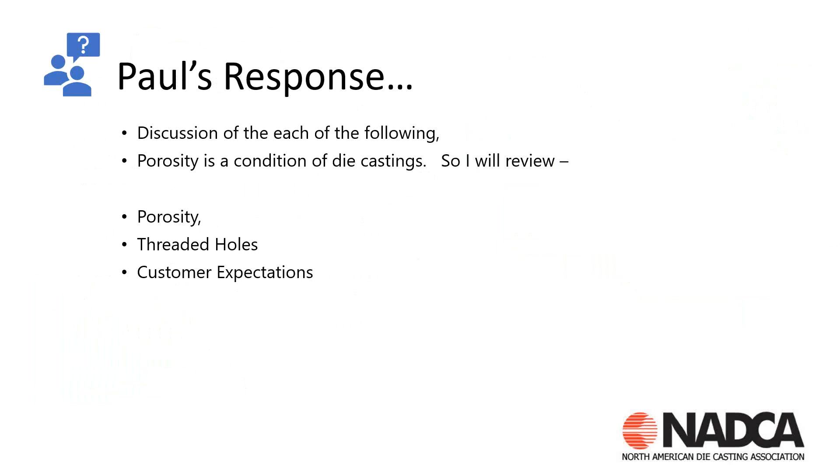Let's talk about threaded holes for just a few minutes. As we see porosity, it's present in the die casting, and the question is where it's coming from—is it from the die, trapped gases, the design, or the process itself? Are we trapping gas in the process? There are a lot of sources for porosity.

When we look at tapped holes, the reason it's a concern is because of thread engagement and thread integrity. When we're looking at thread engagement, we want to make sure that if we have porosity in those threaded areas, as we do a torque test or a pull test on the thread, the porosity is not affecting the overall thread strength.

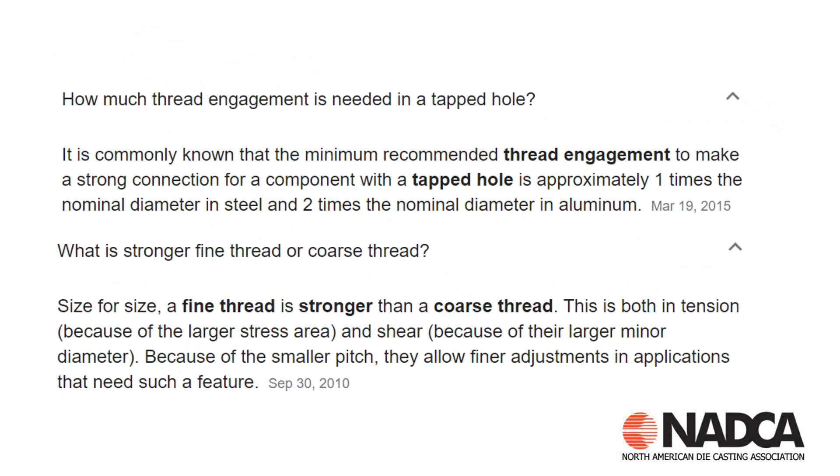One other comment here on the slide is thread size or thread engagement. With fine threads or coarse threads, finer threads are going to be stronger than coarse threads. So if you've got a coarse thread with porosity, you're going to potentially affect the integrity of the thread.

We can calculate—there are a lot of formulas—the actual thread percentage in die casting. When casting aluminum and then threading those holes, we thread using either a form tap or a cut tap. If we're forming those threads, we're actually moving the material rather than removing it. A form thread is stronger than a cut thread.

But the problem with a form thread is you have to follow the draft of the hole. So at the top of the hole, you're going to have less percentage of thread than at the bottom. So if we have less percentage of thread and we form those threads, and we have porosity inside that hole, that porosity being shrink or gas, it's going to affect thread integrity. So going back to the original question, what is the standard?

Well, once again, there isn't one, but I can tell you that external porosity on most standards is 1 millimeter, so 40 thousandths of an inch or less, is allowed on machine surfaces. Most standards then specify a location, and how much porosity you can have - 2 or 3 indications in a diametrical area or some area. Inside a threaded hole, we were typically only allowed 1 to 2 indications of 40 thousandths or less. If more porosity was present on the threads, then those castings became scrap.

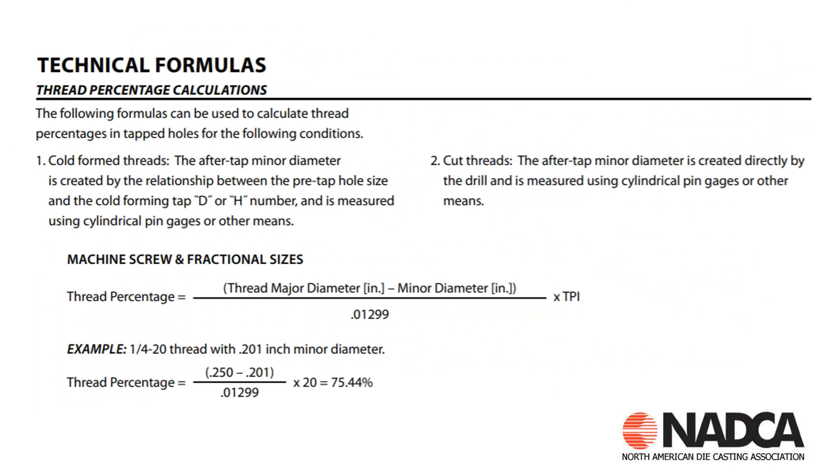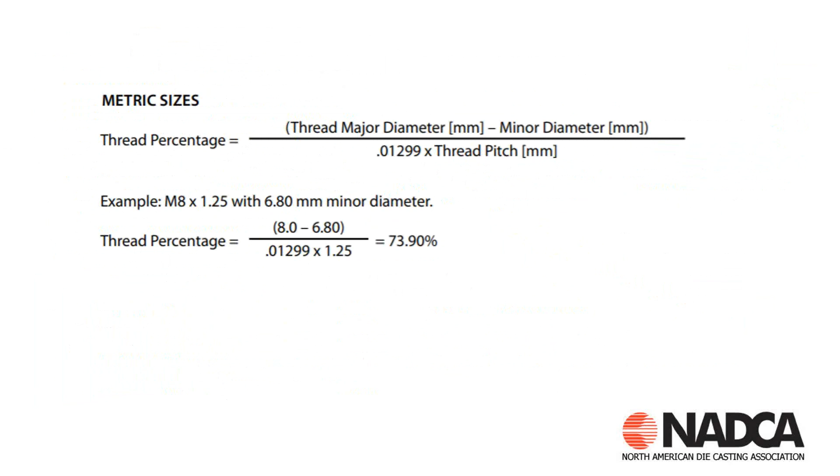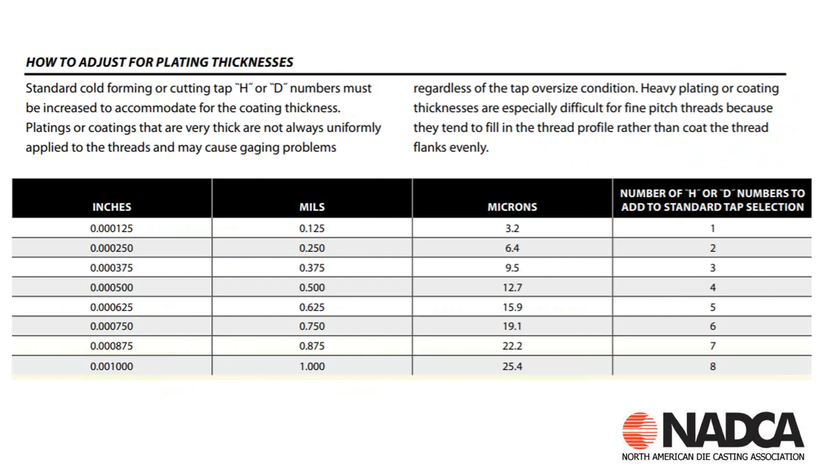So I know that didn't necessarily answer the question as far as is there a standard or what's allowed. I'm telling you, you have to deal with your customers and work with what percentage of thread you want versus what the porosity is going to take away. Each customer is different, and you're going to have to work with your own OEM on those. One other comment: when dealing with threads, you can adjust the D or the H level and adjust the size. That doesn't necessarily affect the porosity, it's just a point of interest.

There are publications that can help you on minimizing porosity. I just threw one up here, publication 516, a guide to correcting porosity.

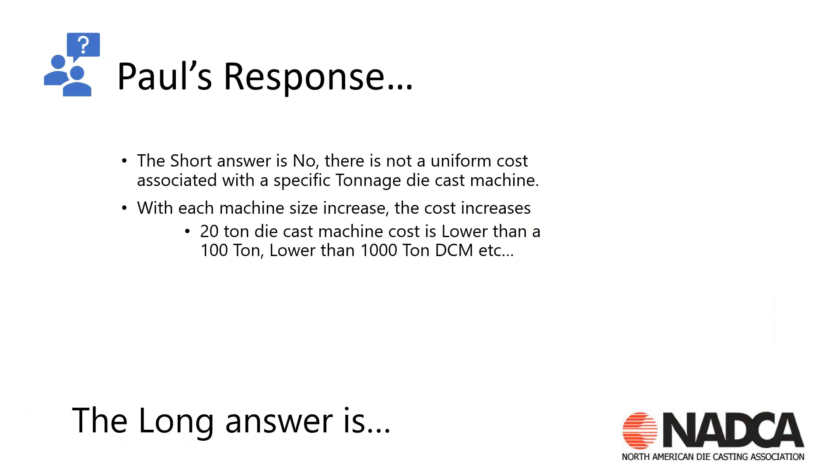Moving on to the next question: is there a commonly used hourly rate to operate die-cast machines of various tonnages when preparing a quotation? The short answer, unfortunately, is no. There's not a uniform cost associated with a specific tonnage of die-cast machine. I'll show you some additional data here in just a minute, data that dates back to, I think, 1994. The fact is that each machine size does have a cost, and that cost increases with machine size. So a 20-ton is going to be lower cost than a 100-ton, lower cost than a 1,000-ton, lower cost than a 4,400-ton.

So the long answer is, when we're looking at the cost of a die-cast process, all this list and the next couple lists are just what go into costing our process. We have the cost of raw material, dealing with the guys making the aluminum, cost of setup operations, accessory costs, how much raw material we're going to be using, the defect rate, so what's your scrap rate, and within every area of the United States, energy costs are not uniform - our gas costs, our electricity costs.

With gas, we have the cost of the gas and the cost of distribution of that gas. We have the raw material sublimation, which is going to be the scrap - what is our dross loss? Are we at a 1% dross loss? Are we at a 5% dross loss? Are we melting in a reverb? Are we melting in a stack?

Then we've got depreciation schedules and accounting systems that are going to come into this. Then you've got a cost of labor. Is it a large OEM, a die casting company that has minimum wage standards, or am I a very small die caster who doesn't necessarily have minimum wage standards, but also doesn't have to compete with those guys? So the cost of labor is going to vary.

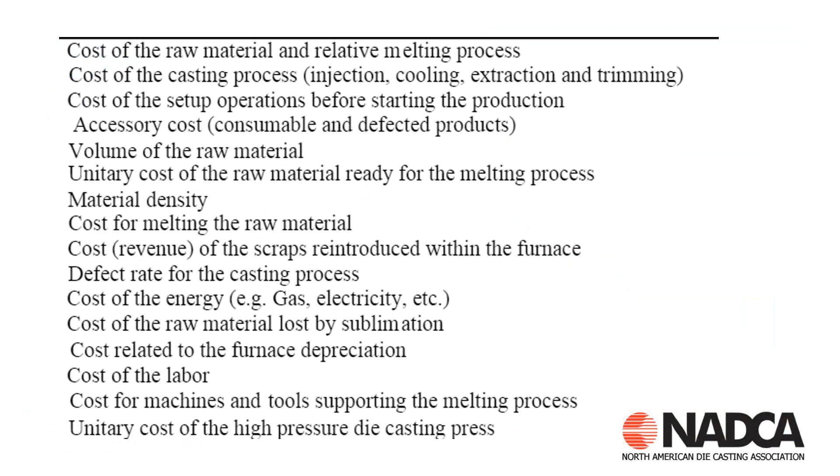Then we get into the cycle time. So we've got all this previous stuff plus accounting factors, and now we're into the cycle time, which is what we all think of when costing a die cast machine - amortizing the machine and how long it takes to make a part. Well, frankly, there's a lot more that goes into it than that. We've got the cycle time of the entire process, the cooling of the alloy, lubrication of the die, extraction from the die.

So once we get past the process and actual casting, making the part, how long did that take? Then we've got other items that affect how well we're going to make a part, which I put in as penalties: penalty for surface roughness, penalty for dimensional tolerances. Tighter tolerances are going to potentially lead to higher scrap, and that affects our overall costing. Lastly, we've got setup time and scrap, and our batch sizes. Are we running 100,000 parts? Are we running 10 parts? So amortizing a setup over the number of parts we run is also going to affect the cost.

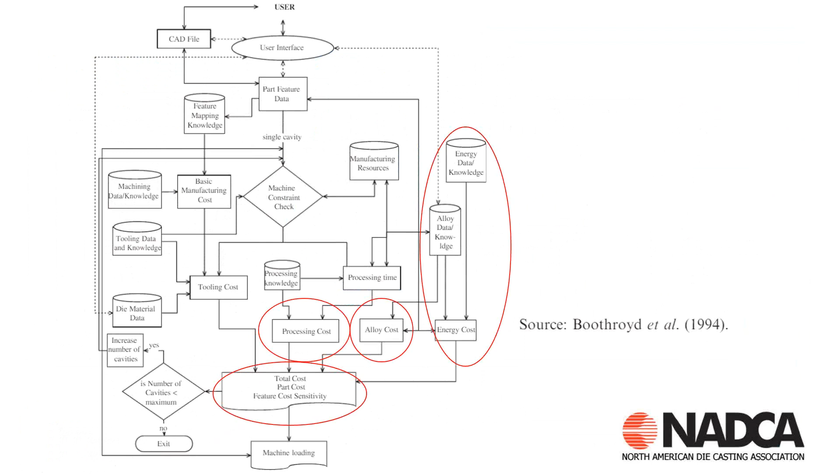One last comment from that same study: this is a visual representation—I know it's kind of an eye chart—of all the things that go into costing our final product. We have this item here, which becomes the total cost and the part cost, and then all of the inputs above: processing cost, alloy cost, energy cost, tooling cost, setup cost, all leading down into a total product cost. So it's a visual representation of costing those parts.

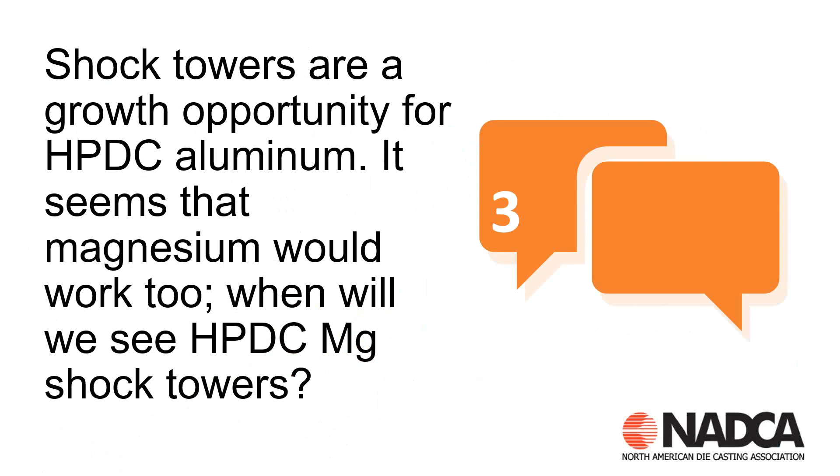Can they make the shock tower? I don't know that. I think the design would have to be adequately modified for the structural requirements and the elongation requirements. But I do know that the magnesium alloys, especially the rare earth element alloys, definitely have the ability to meet the properties and the elongation. Can they meet the tensile and yield? I don't know that. But I do know that magnesium is a good opportunity, a good lightweighting opportunity, but it's going to have to meet the same structural, zero porosity requirements that the aluminum alloys have to meet to make these type of castings.

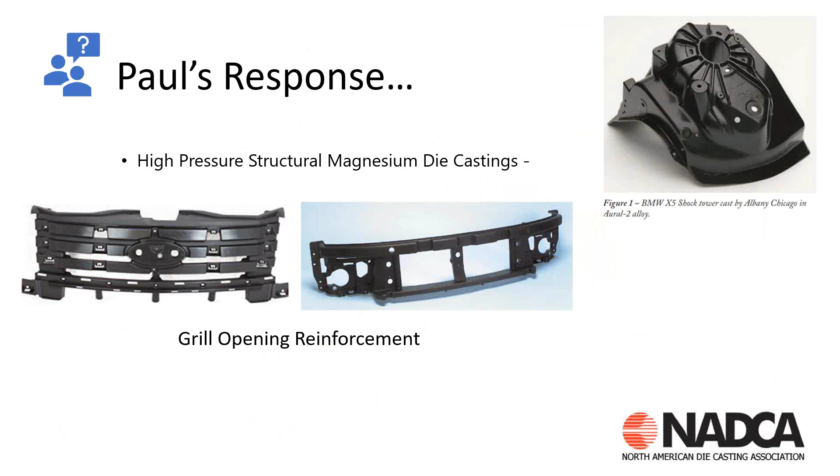Moving on to our next question: what is the best way to initiate process monitoring of die cavity surfaces with an infrared camera? In my opinion, the best way to initiate that is just by using handheld devices like a Fluke or a FLIR or some equivalent device. There's a lot of different devices on the market.

I believe that infrared monitoring or die temperature monitoring is essential to understanding what the temperature of the die steel is, especially your ejection temperature. Knowing that process variable, we have the ability to look at what our distortion is going to be. We can see our cooling of our mold. Can we use conformal cooling in specific hot areas? Do we need to change our die spray for specific hot areas? So I think that these infrared monitoring devices are absolutely essential.

And frankly, with the cost of a very rudimentary one, they have ones that will actually hook up to your phone, made by FLIR and Fluke. Using an infrared device is definitely essential to the process, and a handheld device is probably the best way to get into this.

Now, with that said, I do know of several die-cast companies that are using infrared monitoring devices that are actually attached to the die-cast machine. So they've got these devices monitoring the cover half and the ejector half of the mold, and they monitor every shot. They can take up to 200 readings on the cover, 200 readings on the ejector.

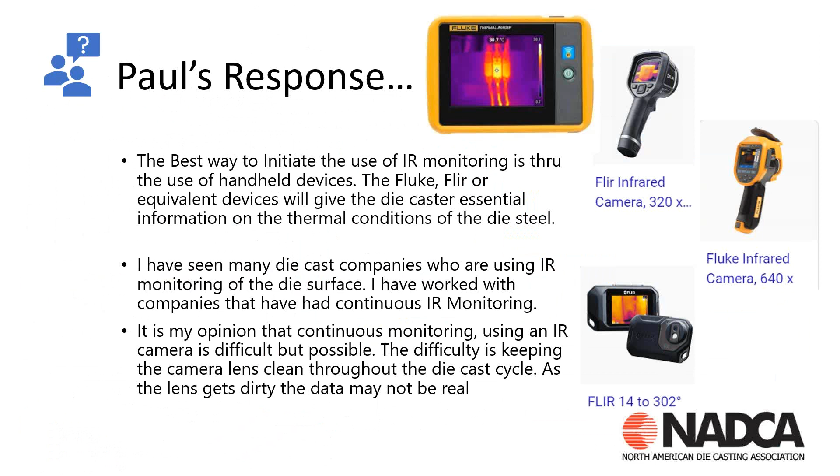So we had a question, Paul, how tall are you? So at last measurement, I'm 5'11". That really doesn't help us make better, faster die castings. And I want to thank Dan for that question.

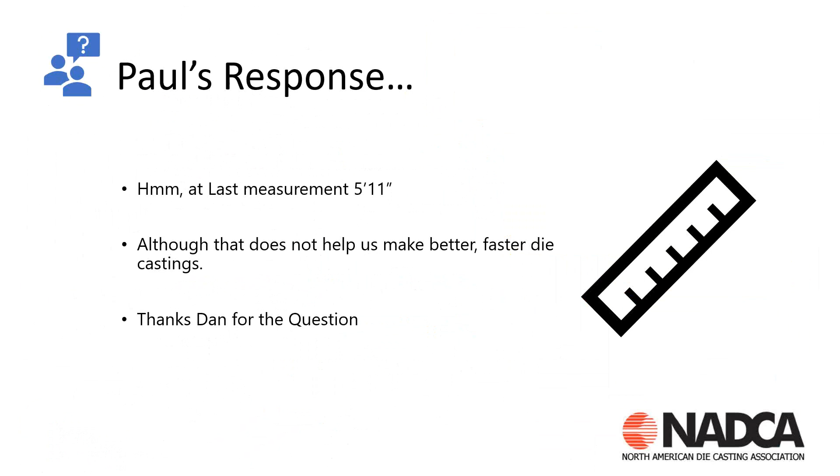All right, moving on. What is the main difference between ADC12 and K alloy? Each alloy has very specific properties, and those are going to come down to the chemistry.

So when we think of ADC12, that's very close to a 383 alloy, and typically ADC12 is compared to 380. When comparing ADC12 to an A380 alloy, it has better fluidity and better resistance to hot cracking at elevated temperatures. That alloy has a slightly higher silicon level, a little bit controlled copper level, but when comparing directly to 380 alloy, it can improve the fluidity and make a more fluid tight casting, or a leak-free casting.

K alloy, on the other hand, is a highly corrosion resistant aluminum alloy that has slightly higher properties than the ADC 12.

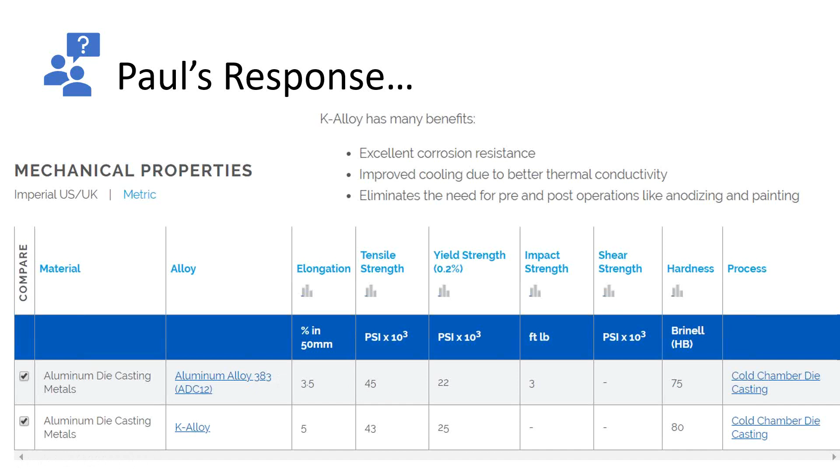There are several different specs. Customers have specs on ADC 12, and some customers tighten this range, but overall, it's going to fall somewhere within 1.5 to 3.5% copper.

Another change is going to be the manganese. So the manganese in the K alloy is a controlled level of 0.5 to 0.6, and the manganese level is a max of 0.5% in ADC 12. So I can have from 0 to 0.5% manganese in ADC 12.

This is a requirement, if I'm going to drop this copper level, control the iron level, and pretty much maintain the silicon level, 9.6 to 12 in ADC 12 and 9 to 11.5 in K alloy. So once again, our biggest single difference is going to be the copper levels.

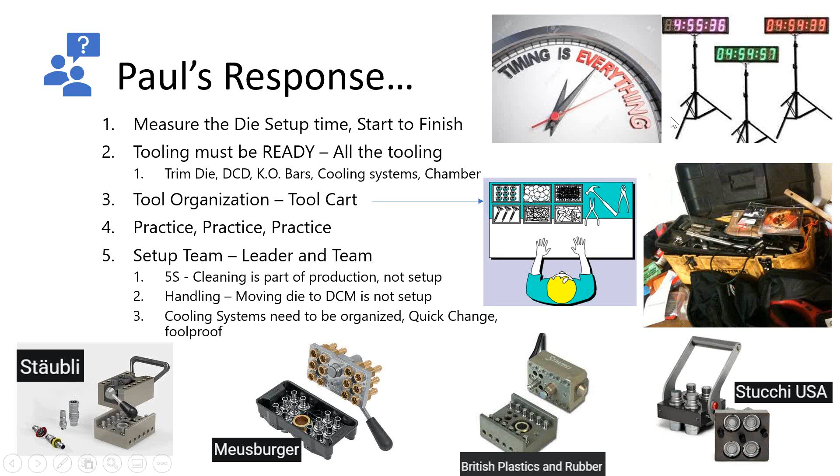In the same vein, this next question is: what is considered world-class for setting up a tool for changeover time, for 1,600 ton, 2,500 ton, and 3,500 ton die cast machines, considering the water lines, chambers, and manifolds are going to be constant?

World-class, I really can't answer that. I can tell you what I know as best in class by seeing a lot of different die casters and knowing their setup times. What I have seen is a 1,600 ton multi-slide die be set from last good part to first good part in 4 hours.

Now, that wasn't a phenomenal feat for this particular company. This was a standard event. They really practiced SMED and focused on getting the tool in, getting it set, getting the previous tool out, and making that next good shot. And they were monitoring the time.

So for a 2,500 ton machine, I've seen good die sets done in 7 to 8 hours. And for a 4,400 ton machine, done in about 15 hours.

Now, the other side of that is I've been in several plastic injection molders. Their tooling, not die cast but injection molding tools, is very similar to die cast tools. So a 2,500 die set, I've seen that done in 21 minutes, start to finish. Now, the manifolds and all the cooling were all actually attached to the tooling. So as they clamp that die using die stakes onto their plastic injection molding machine, all of their cooling lines attached at one time to manifolds.

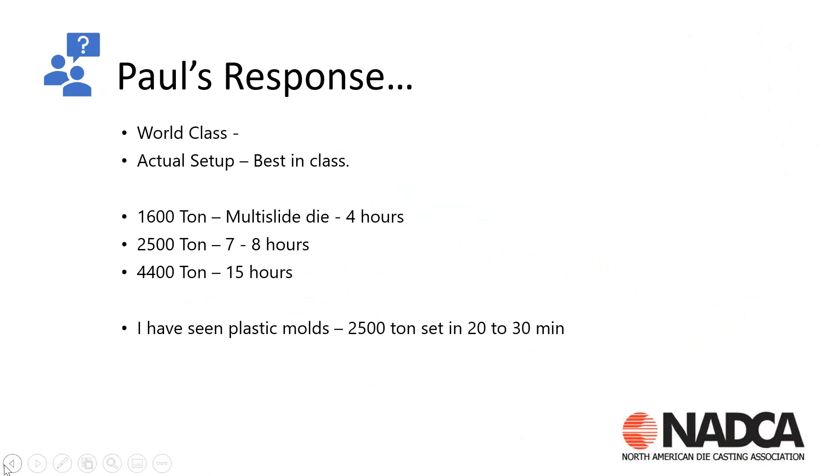So nobody was actually attaching anything to the tooling. I haven't seen that done in but 1 or 2 die casters, and only on a limited basis. So what can be done and what is being done are very different. These are just examples of what I have seen.

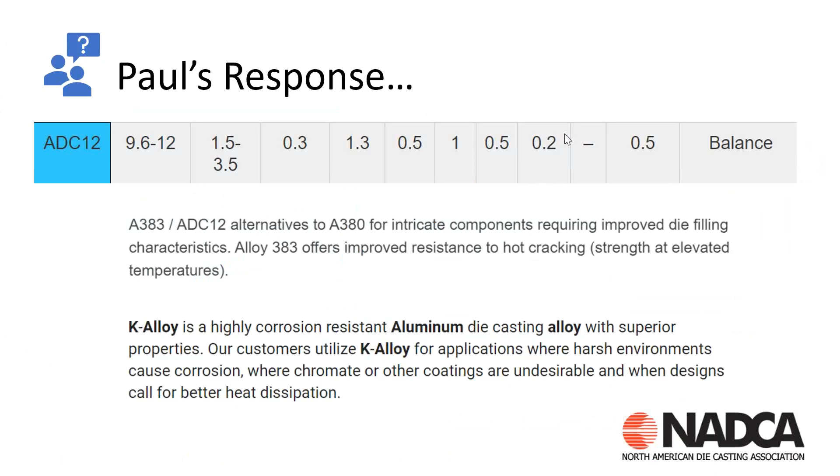The last one says, can I show question 2 again? So let's go back to the very beginning. There's question 1.

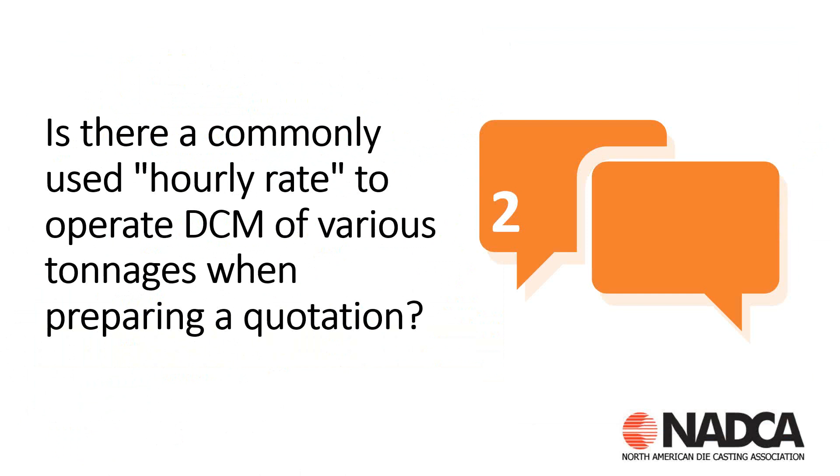And here's question 2: Is there a commonly used hourly rate to operate die-cast machines of various tonnages when preparing a quotation? I'm going to jump to what I summed up, and that is this: there have been studies showing an hourly rate. Once again, this is back to 1994. There are no current studies, and a lot of that is going to depend on your location and the economic condition of wherever the casting source is.